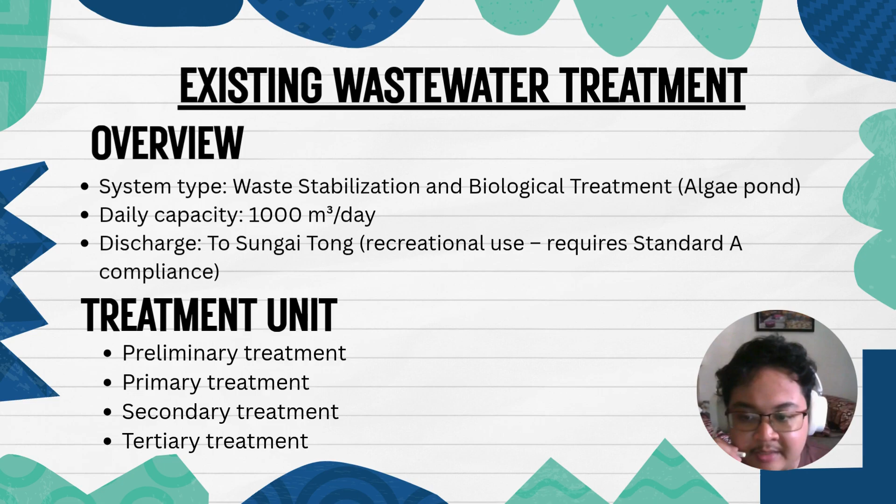Today I'm going to present about the existing wastewater treatment at Bau Palm Oil Mill, Bapom. Currently, Bapom uses a hybrid biological treatment system with a daily capacity of 1000 cubic meters. The treated effluent from the Bau Palm Oil Mill will be discharged to Sungai Tong. This treated effluent needs to comply with Standard A of EQA 1974. There are four types of treatment unit, which are preliminary treatment, primary treatment, secondary treatment, and tertiary treatment. This is the existing wastewater treatment plant of Bapom flowchart.

The process begins with preliminary treatment, where the raw effluent passes through a sludge pit to settle heavy solids and then moves into a cooling pond to reduce its temperature, followed by screening to remove debris. The primary treatment involves a single anaerobic digester, where the microbes break down organic pollutants in the absence of oxygen, and a sedimentation tank that will help to recycle the sludge.

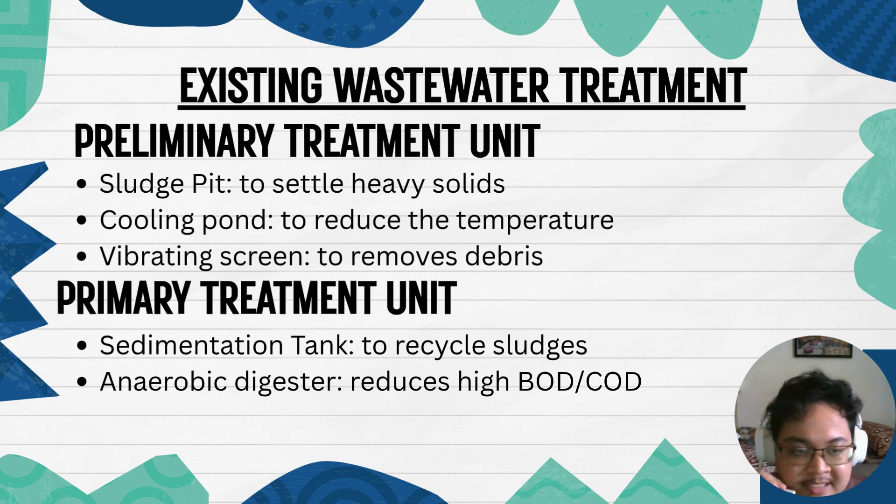For secondary treatment, it consists of four facultative ponds, two aerobic ponds, and an algae pond. These units will help in reducing the BOD, COD, suspended solids, and nutrients like nitrogen and phosphorus of the effluent. The tertiary treatment includes the aerobic reactors, clarifier, and both stone and sand filters. The system also has contact aeration reactors or CAR units, which boost oxygen levels and enhance microbial breakdown of remaining pollutants.

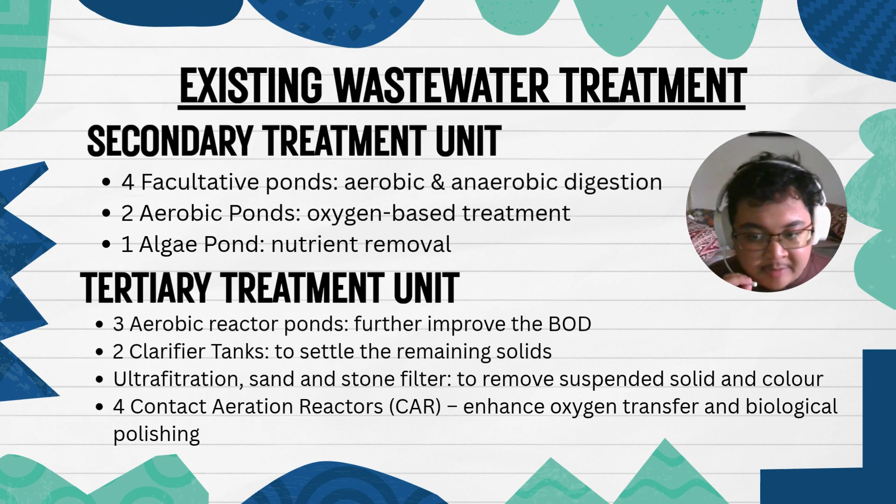Although the wastewater treatment system at Bau Palm Oil Mill has been effective, it faces several key limitations. Firstly, the system is designed to treat only 1000 cubic meters of effluent per day. During heavy rainfall, this capacity is often exceeded, which causes overflow, risking untreated discharge into the Sungai Tong. Secondly, the number of contact aeration reactors is limited to just 4 units. This makes it difficult to handle higher pollutant loads, especially during peak operation or rainy season.

Thirdly, there is no odor control system in place. Gases like methane and hydrogen sulfide are released from the anaerobic digester, affecting the air quality and potentially causing discomfort to nearby communities. In addition, the mill lacks a proper sludge treatment facility. The sludge is only stored and not stabilized or treated, which can lead to leachate issues and environmental risks. Lastly, the methane gas produced during digestion is flared off, resulting in wasted energy and greenhouse gas emission.

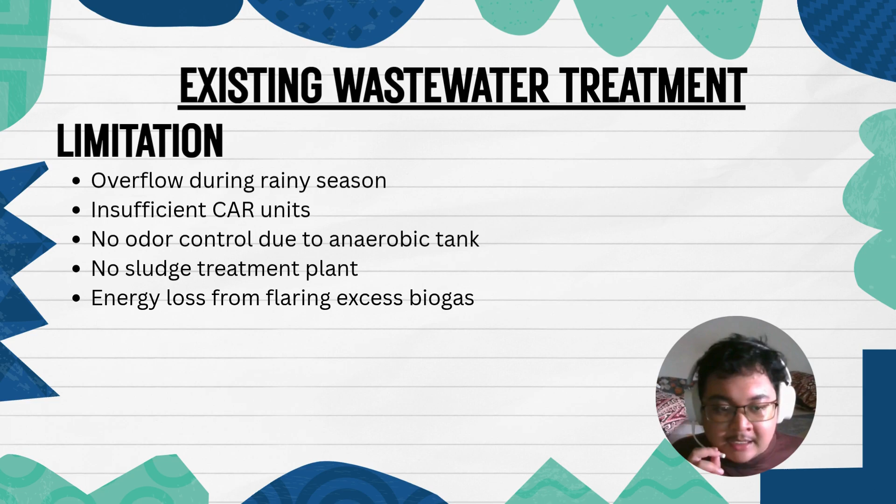Now that we have identified the limitations of the existing wastewater treatment system, our proposal aims to improve it by upgrading, not replacing, the existing setup. The goal is to keep the parts that still work well and enhance the system to meet today's needs more effectively.

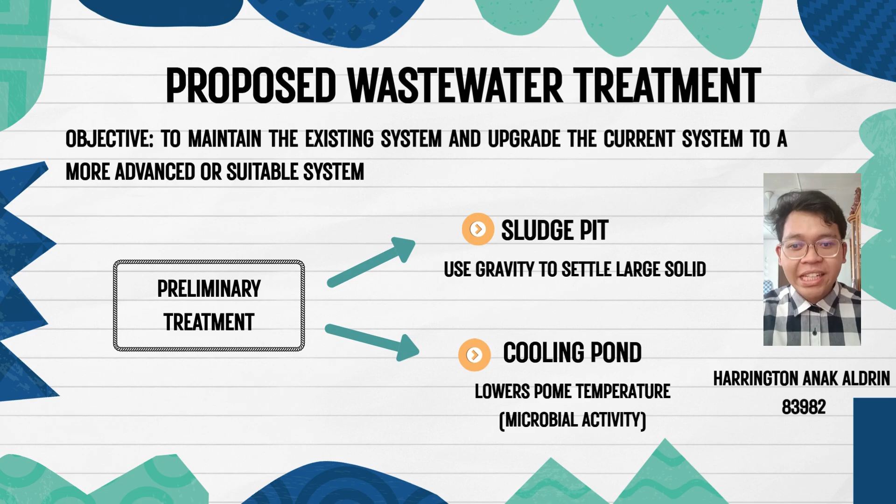Starting with the primary treatment stage, the current anaerobic pond is both uncovered and undersized, making it prone to overflow during heavy rainfall and releasing unpleasant odors such as methane and hydrogen sulfide. To resolve this, we propose adding additional anaerobic ponds to increase treatment capacity, as well as installing gas canvas covers. These covers help to trap those harmful gases, prevent rainwater dilution, and allow for the capture of methane, which can be flared or used as an energy resource.

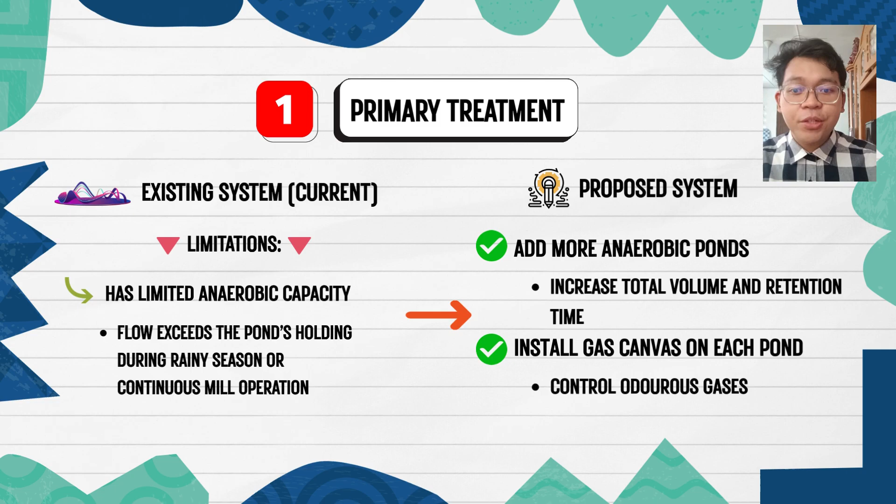In the tertiary treatment stage, the plant currently uses six contact aeration reactors or CAR, two clarifiers and sand filters. However, the system often struggles during high flow periods, leading to poor final treatment of the water. To solve this, we suggest increasing the number of CAR units from 6 to 9 or even 12 units to handle larger volumes more effectively.

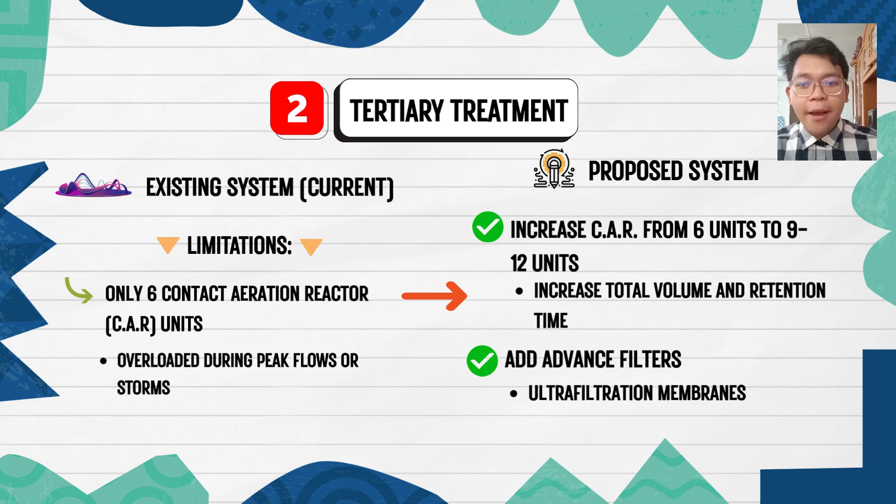We also propose upgrading the clarifier for better sludge removal and adding an ultrafiltration membrane to help filter out fine particles, colors, and leftover pollutants. These changes will help ensure the treated water consistently meets the high quality Standard A discharge requirements.

Hello, my name is Muhammad Zainifat and I'll be talking about the tertiary treatment tank design. So the problem in Bapom is that whenever it rains, the tank would overflow. The tank that would overflow is the contact aeration reactor.

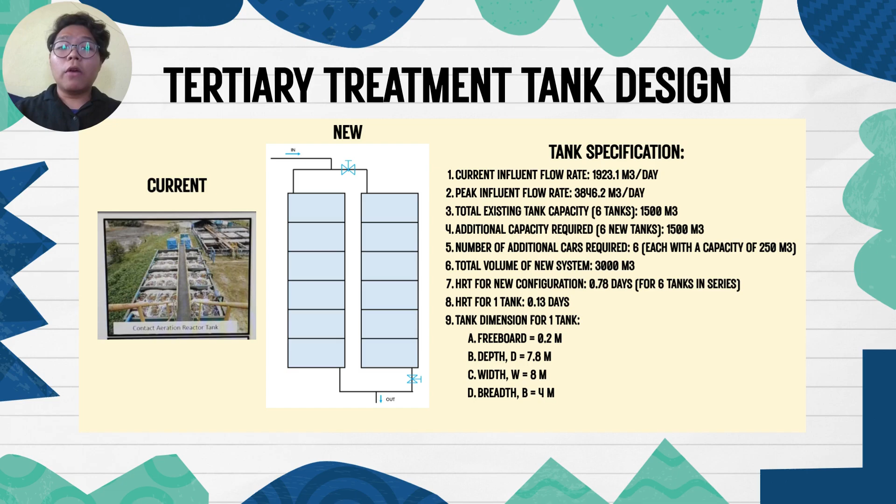So what we propose is they can add another 6 tanks, but this time the current tank and the new tank will be in parallel configuration. What parallel configuration does is it will divide the peak flow by 2. That means it will be able to sustain the peak flow whenever it rains. So for the tank dimension, it will be the same as the previous tank or the current tank design, which is 0.2 meters freeboard, 7.8 meters of depth, width of 8 meters, and breadth of 4 meters.

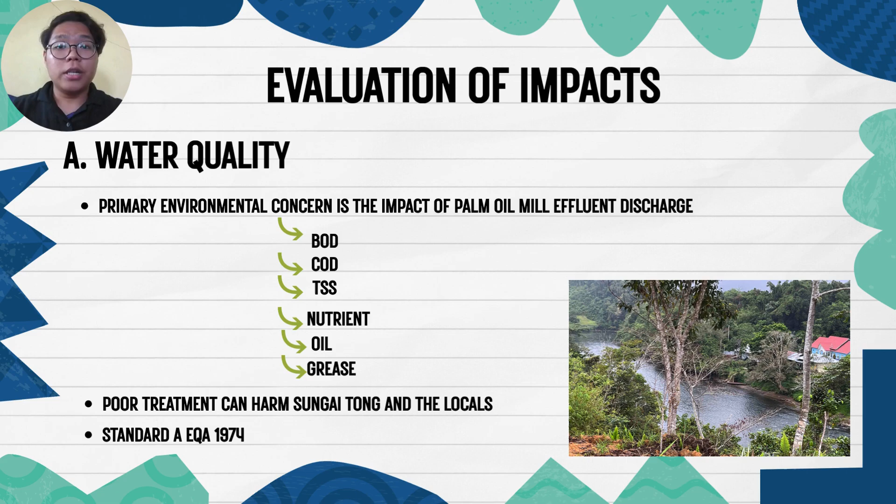Evaluation of impacts. One of them is water quality because we are concerned about the discharge of the palm oil mill. We can measure parameters such as BOD, COD, DO, TSS, nutrients, oil and grease being released to the river. Why? Because poor treatment can harm the local river and the locals. But it is found that the discharge is in compliance with Standard A EQA 1974, which means it is good for recreational activities and is not harmful to the river's ecosystem or to the people.

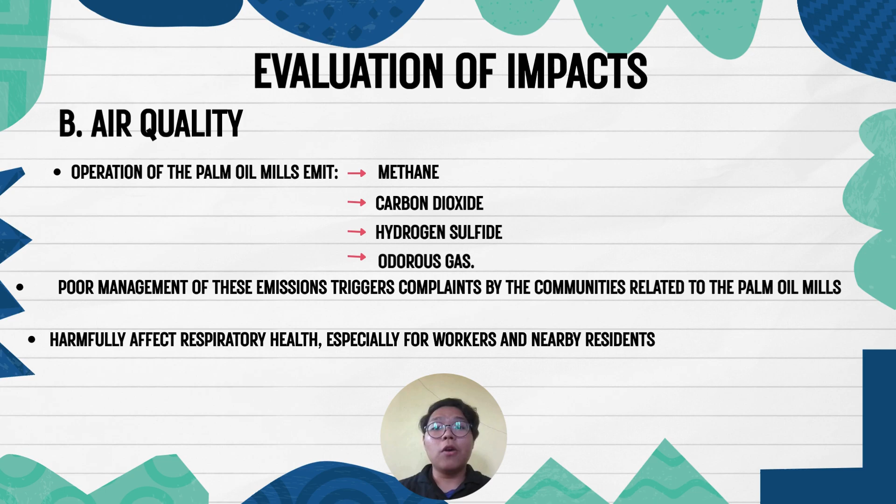Air quality. All palm oil mills will emit methane, carbon dioxide, hydrogen sulfide, and odorous gas. Poor management of this emission will trigger complaints by the communities. And these gases can harmfully affect respiratory health, especially for workers and nearby residents. But for now, we have not heard any of these complaints. So it means they are very compliant with the Jabatan Alam Sekitar guidelines.

Next, we want to evaluate the impacts of BAPOM to the soil and land use. BAPOM covers large areas of land used for palm oil mill effluent, such as treatment ponds, sludge storage, and also waste handling. What can possibly happen is soil erosion, contamination, and loss of land productivity if the management of the effluent is very poor and unprofessional.

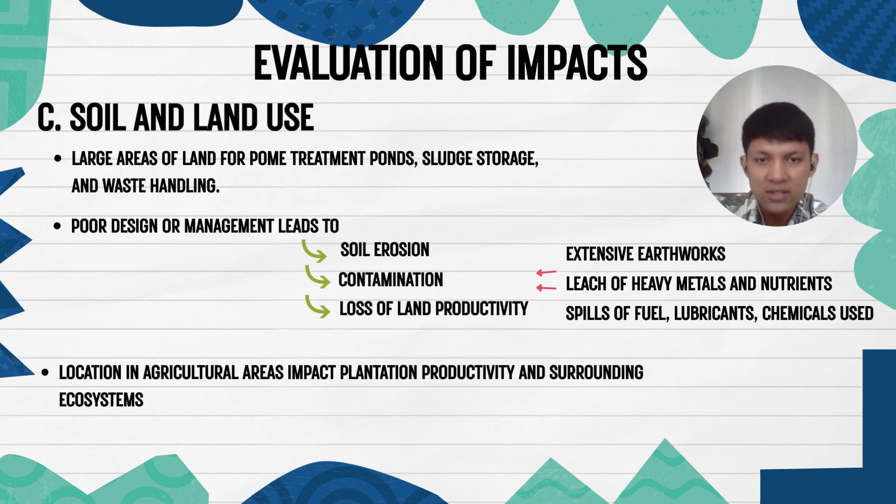This soil erosion, contamination, and loss of land productivity can be caused by extensive earthwork, leaching of heavy metals and nutrients, and also possible spills of fuel, lubricants, and chemicals used during the operation of this mill. And don't forget the location of BAPOM, which is surrounded by agricultural areas, can impact the plantation productivity and surrounding ecosystem. After evaluation of impacts, it is necessary for us to do mitigation measures also.

Mitigation measures are essential to minimize the adverse impact of the wastewater treatment plant on the environment and human health. This method focuses on controlling and minimizing the harmful effects of palm oil mill effluent. So the first one, water quality. The mitigation measure that we can do in water quality is ensuring all discharged effluent adheres to Standard A of EQA 1974.

So what can we do to mitigate the water quality? First, we can apply membrane separation technologies such as ultrafiltration or reverse osmosis. Second, we can apply low energy tertiary treatment options such as constructed wetlands. And we can also do regular effluent monitoring, including routine sampling to check the water quality like BOD, COD, TSS, and so on.

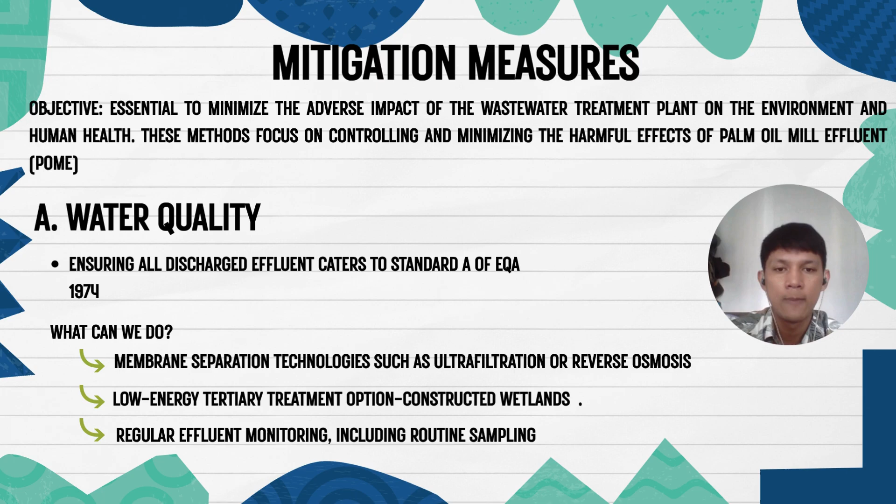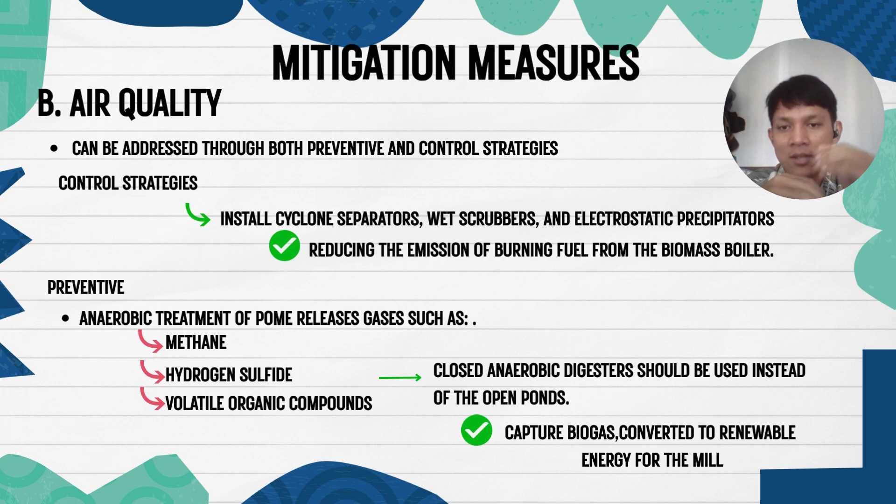Mitigation measures for air quality can be addressed through both preventive and control strategies. For control strategies, we can install cyclone separators, wet scrubbers, and electrostatic precipitators. This control technology can reduce the emission from burning fuel in the biomass boiler. And we can do a preventive solution, which relates to the anaerobic treatment. We know that anaerobic treatment produces gases such as methane, hydrogen sulfide, and volatile organic compounds. These gases are really dangerous.

What we can do here is to use a closed anaerobic digester instead of open ponds, because the closed anaerobic digester can capture the biogas and then convert it to renewable energy for the mill.

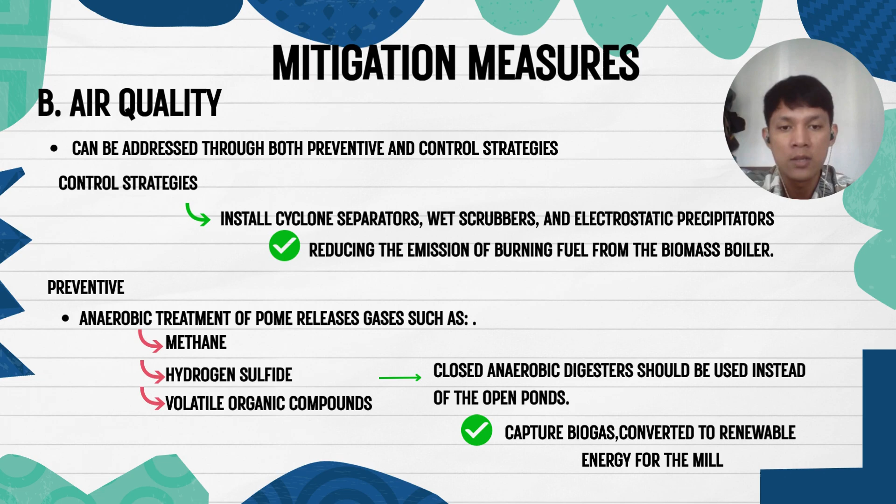Mitigation measures for soil and land use. Soil contamination and land degradation at BAPOM can be reduced through proper site planning, containment infrastructure, and restoration strategies. First, all chemical and fuel storage should be placed in bunded zones, and native vegetation planted to restore soil stability. And in case BAPOM or any industry wants to extend their wastewater treatment plant, they can use temporary drains and sediment traps to avoid runoff during floods, which can also affect the quality of the soil.

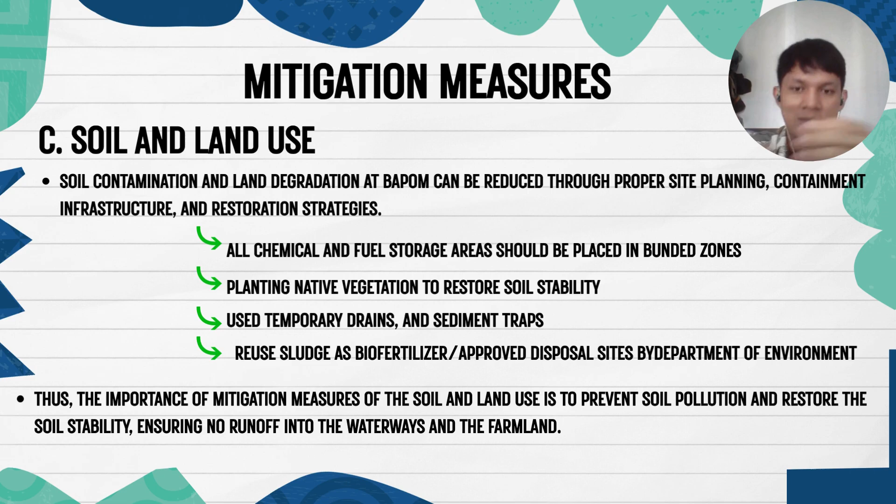And the last one, the industry can reuse sludge as biofertilizer or dispose of it at disposal sites approved by the Department of Environment. Thus, the importance of mitigation measures for soil and land use is to prevent soil pollution and restore soil stability, as I mentioned just now, and to ensure there is no runoff into the waterways and the farmland.

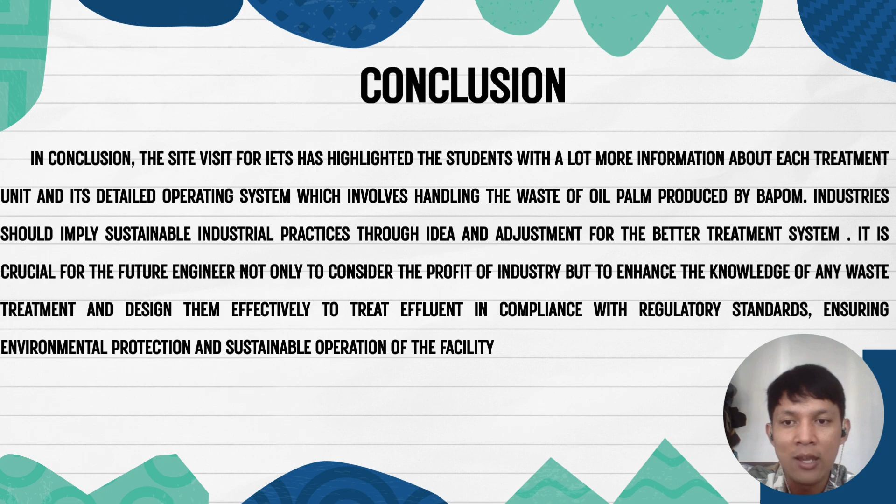In conclusion, the site visit for IETS has enlightened the students with a lot more information about each treatment unit and its detailed operating system, which involves handling the waste of oil palm produced by BAPOM. Industry should apply sustainable practices through ideas and adjustments for a better treatment system. It is crucial for future engineers not only to consider the profit of industry but to enhance their knowledge of wastewater treatment and design systems effectively to treat effluent in compliance with regulatory standards, ensuring environmental protection and sustainable operation of the facility.